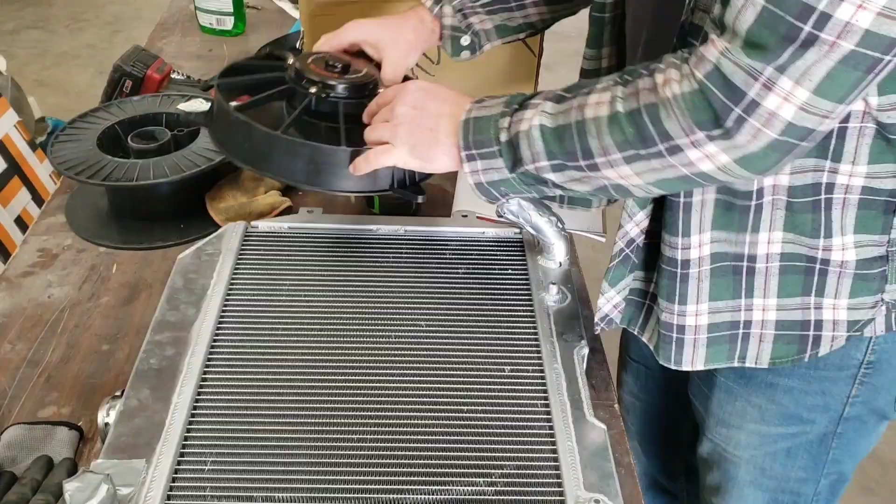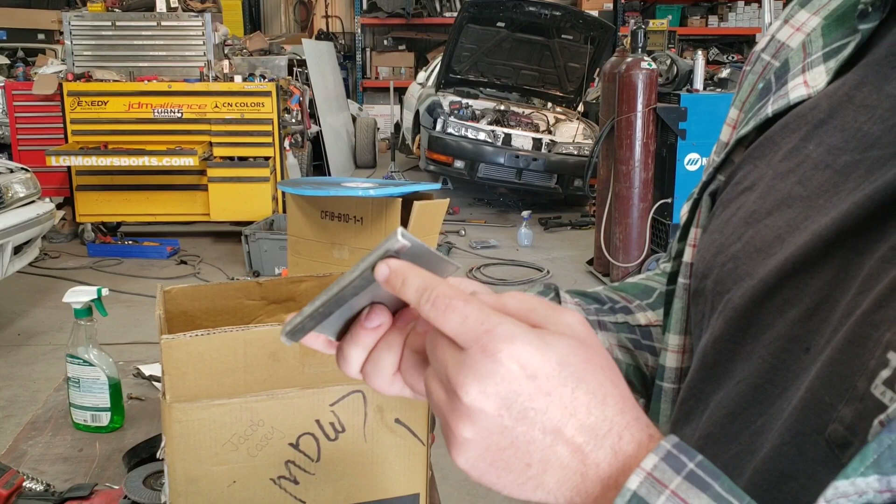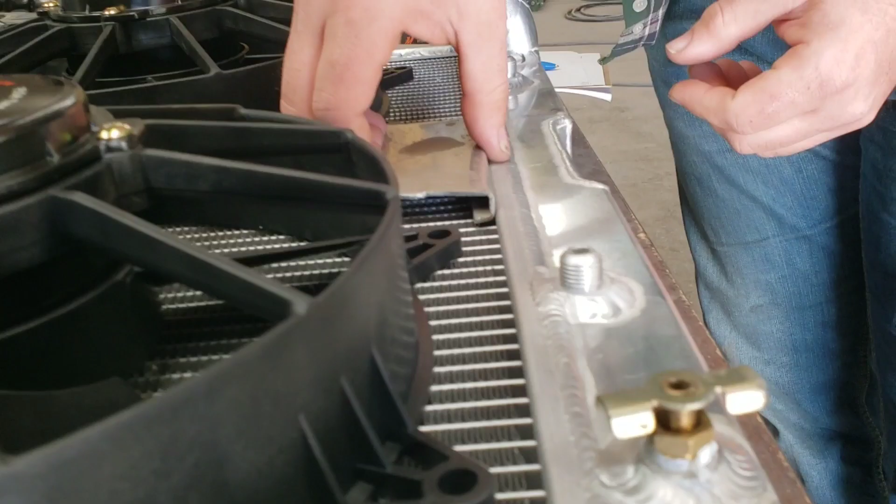We're going to be running 2 of these Mishimoto fans, and I've already gone ahead and bent up a test piece of how we're going to do this. So this is 080 aluminum. What we're going to do is make a lip and another lip with a flat surface, and we're going to put that foam right along the bottom there. So when it sits down on the fins, it's got a nice cushion to it. It's not going to sit there and rub through the fins of the radiator or anything.

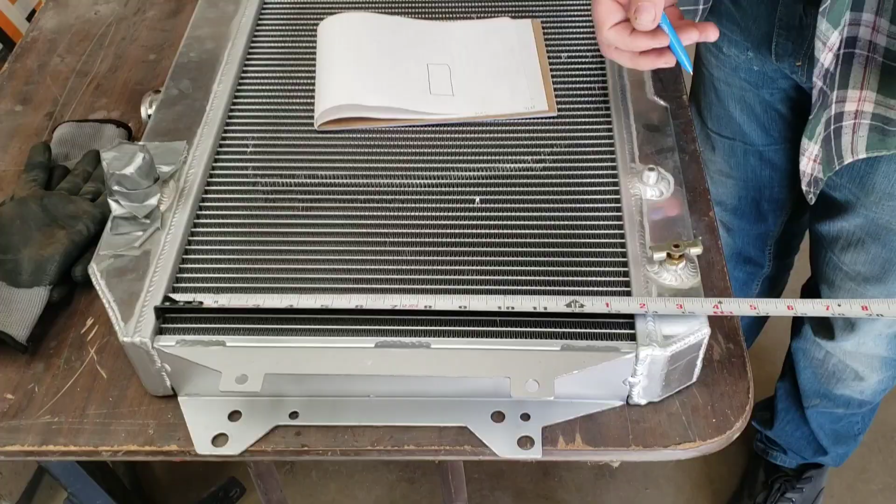So let's get started. So I'm drawing up the radiator shroud of how I want to do it. We're going to start by measuring the radiator. Inside to inside we have 13 5/8, so we'll just call it 13 1/2. It'll give us a little bit more space. And then we're going to do inside to inside long ways, and we've got 23 1/4.

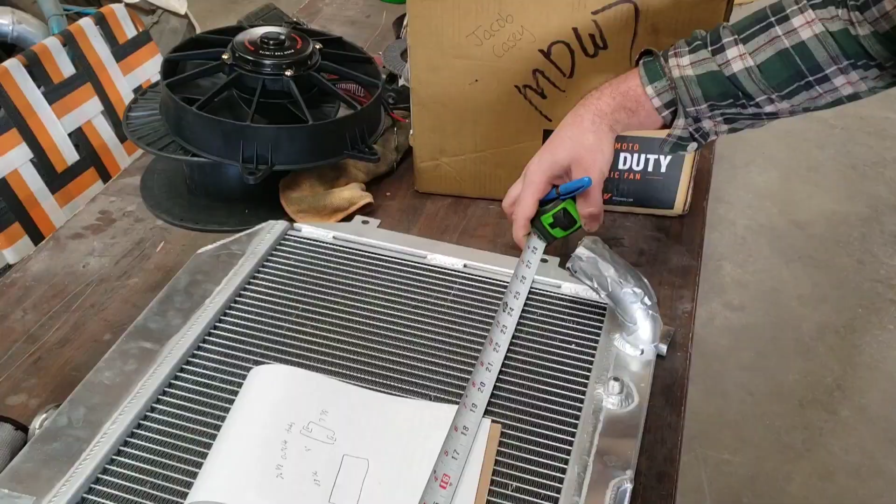And then we're going to go to the outside and add for the mounting points. And then our mounting tabs here, we've got 9 inches outside to outside. Just start on an even number. So 2 to 9 7/8, so that's 7 7/8 center to center. The same thing across. So that's 27 5/8, so we'll put 25 5/8.

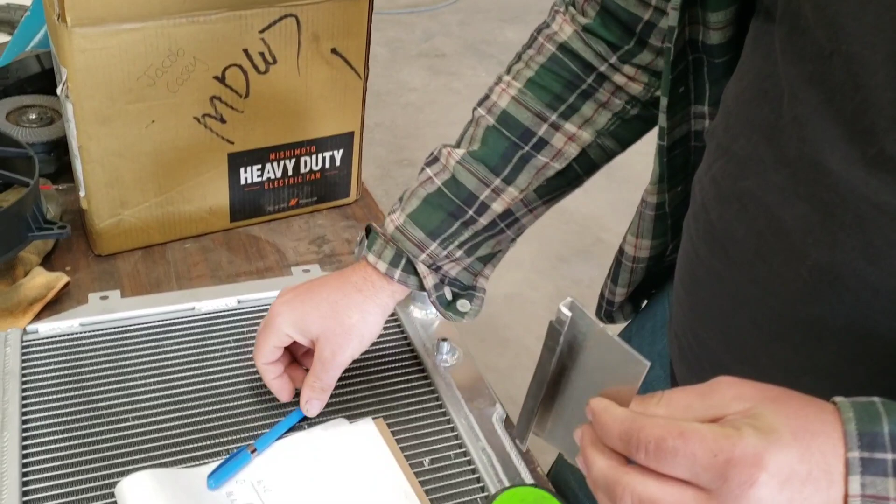So like I said, I've got a test piece here of how we're going to do this. So you've got about a 1/4 inch spacing here and a 1/2 inch spacing here. So we're going to add on another inch to this. So we'll call it 1/2 inch, and we'll call it 1/2 inch because the radius of the bend is going to reflect some of that. We're actually going to go 23 1/4 just to get our inside to inside, and then on the drawing I'll add the excess mounting points. So let's go ahead and draw it up.

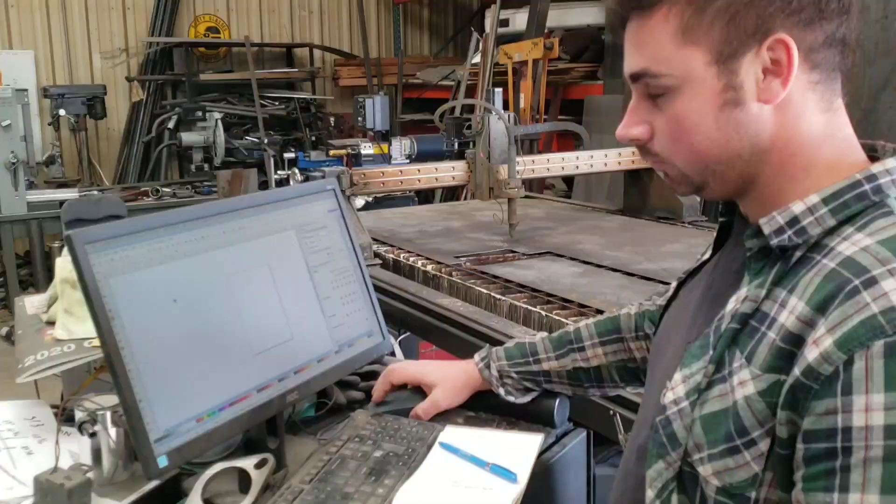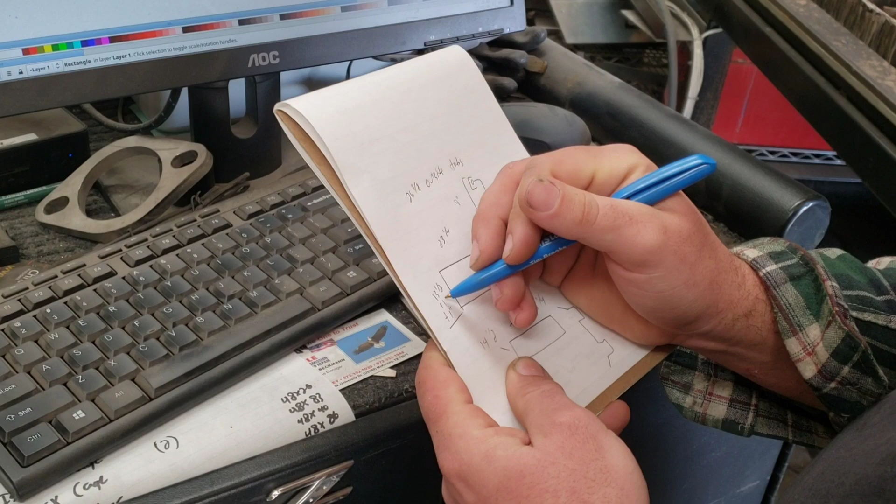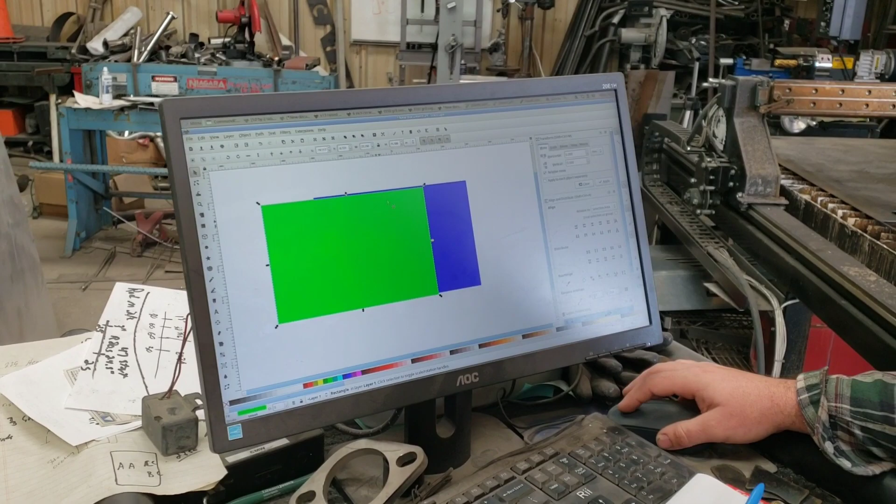So being that I don't have CAD software at the shop, we are going to be drawing this up on Inkscape. And the width of it is going to be 23 1/4. And the height, we're going to have our 13 1/2. We're going to have +1 for the bottom, +1 for the top. So we're going to have 15 1/2. So now what I'm going to do is make a secondary one. And we're actually going to change the height to 13 1/2. Center these two up.

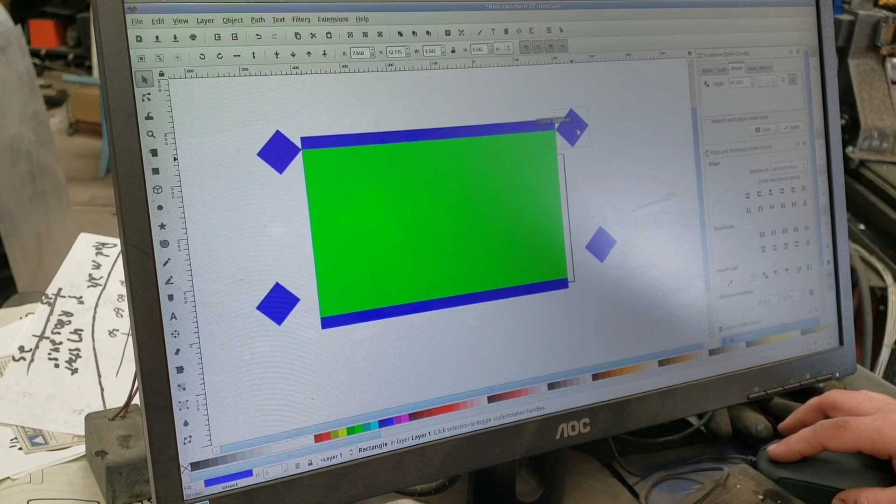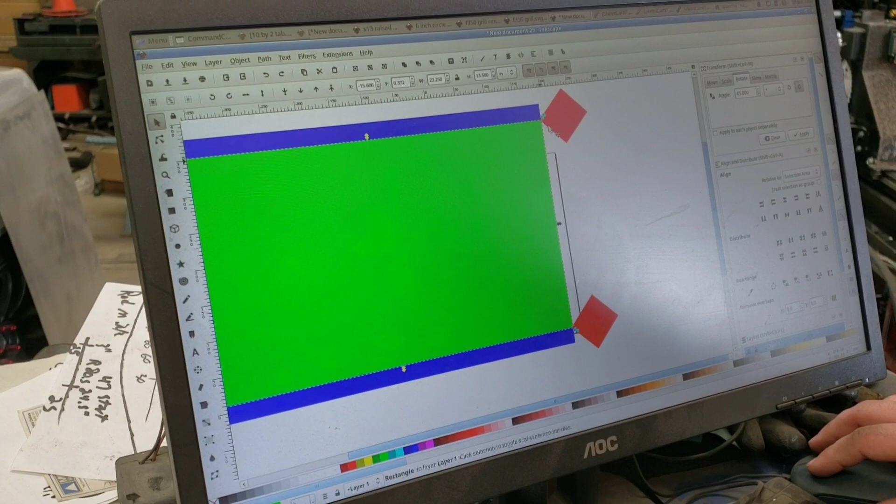So the green rectangle here gives us our dimension of the radiator itself. And so we're going to take this. This is an easy way to make some bends. If you put these spikes on here, you'll see what we're doing. So we just want to get those corners all lined up, move those in, and I'll change these to red. And you can see here that red is overlapping our blue, which is the shroud that we're making. So that point to the other point here, that's where we're going to make our bend and give us the dimension of the radiator. And I'm probably elaborating on this way too much.

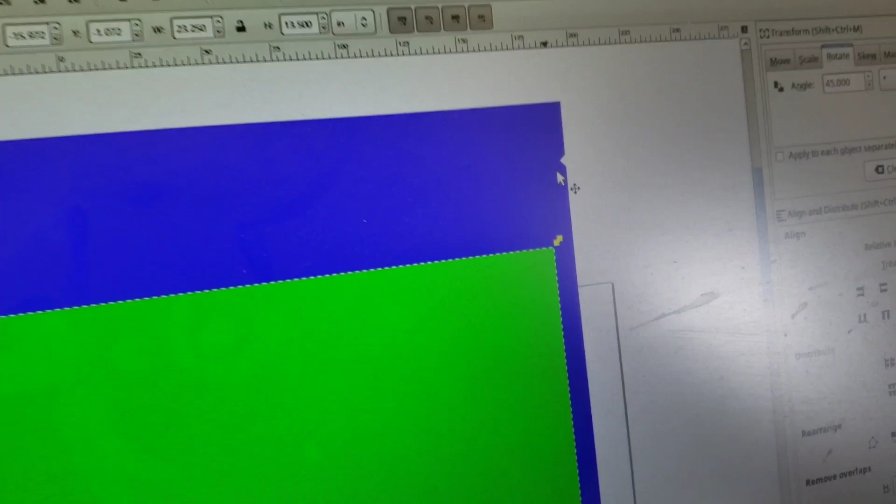So we're going to make all those one, and then we'll select our inside square and subtract them. Now you can see that notch that we have there. That's going to tell us where to bend this. I just went ahead and drew this up. It was taking forever for me to try to do it on camera. It would have made this video an hour long, but it only took me about 20 minutes or so.

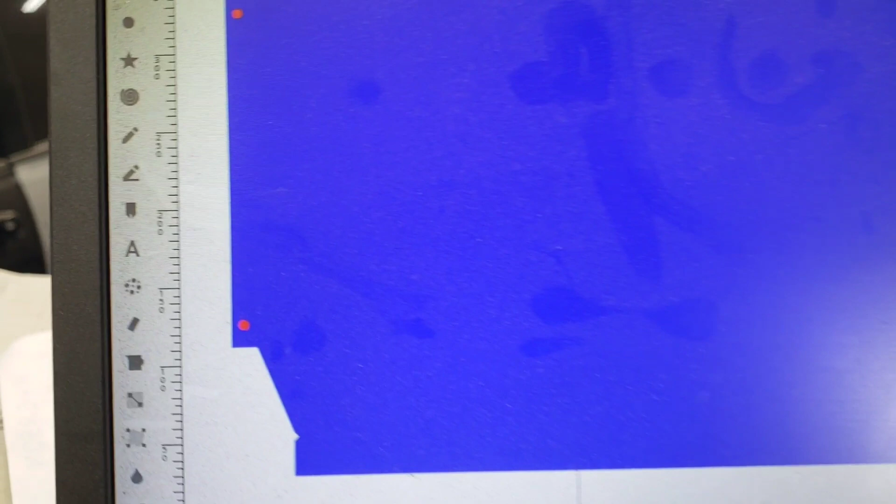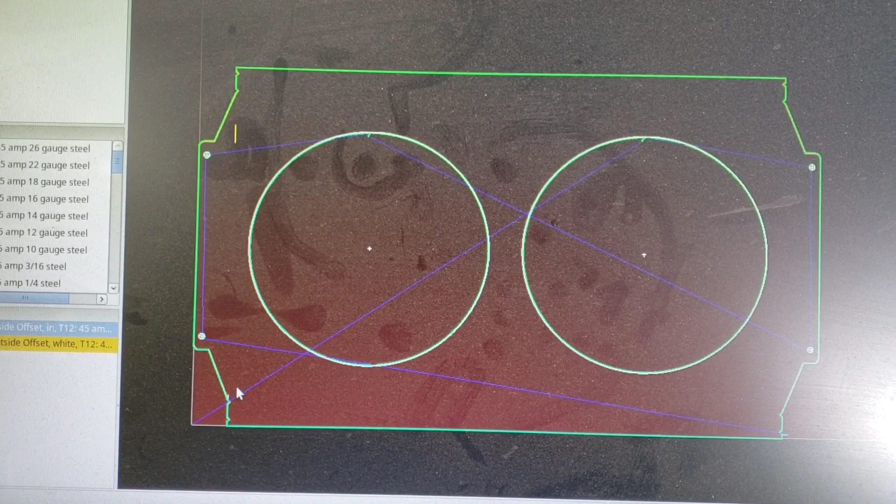So there's our fan shroud outside with our mounting tabs and the red dots. And so what we're going to do is trace up the fans and go ahead and cut the circles out for those. So here's our final flat surface layout for the fan shroud. I've already put it in SheetCam, made the G-code file, had a couple little pieces here that don't really matter much. We just ignored those. Got it loaded. We've got our material loaded, and we are ready to cut.

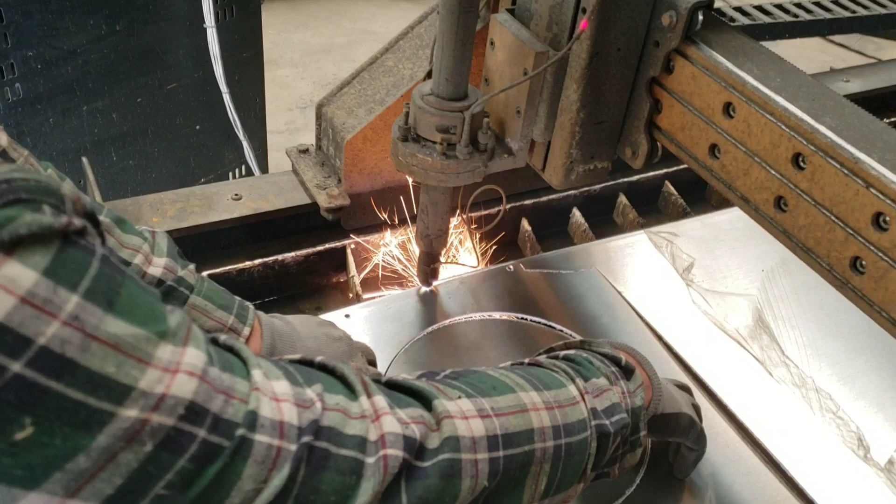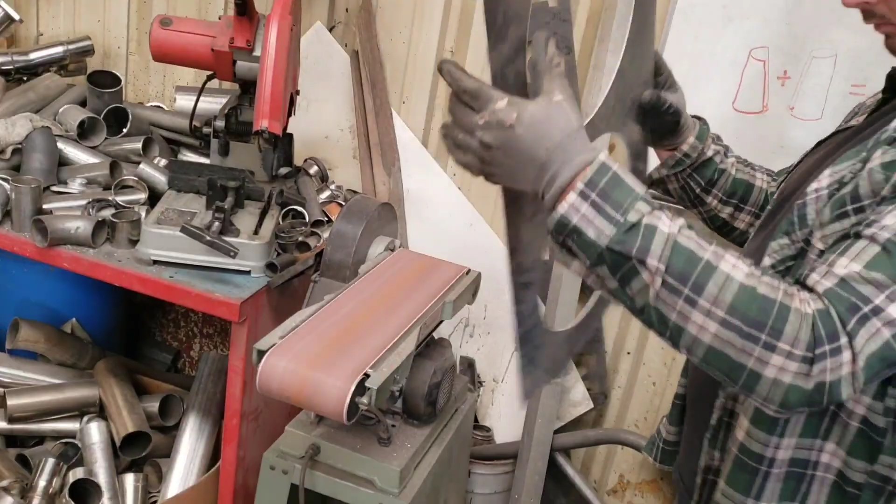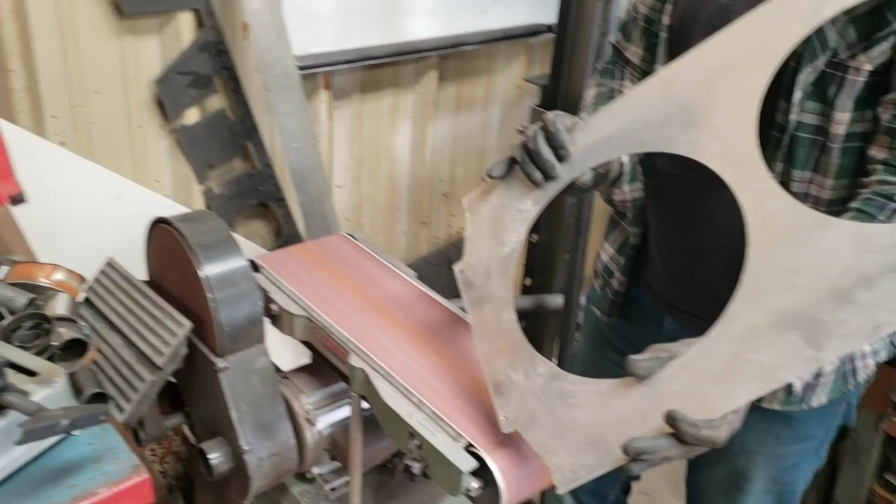We finally have our piece. So we'll go ahead and clean up the backside and deburr it all and get it bent up. We're gonna go ahead and use our deburr tool, clean up these outside edges. Now that we've got it all cleaned up, let's go bend it.

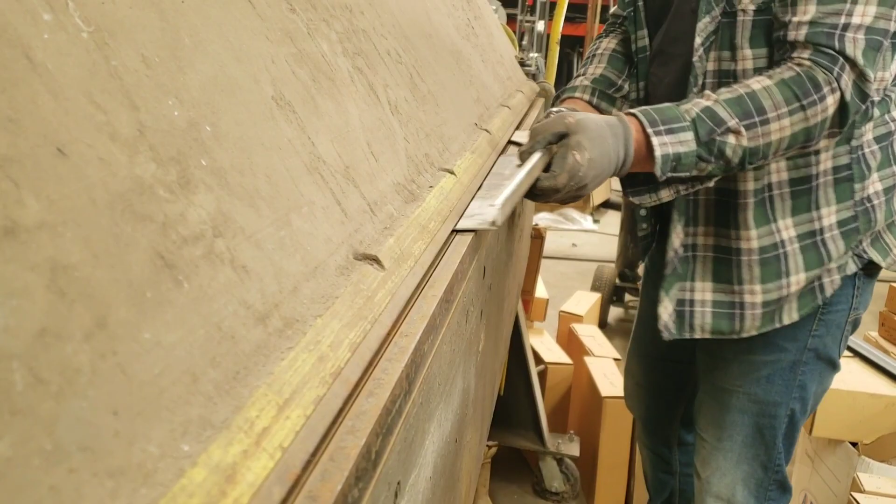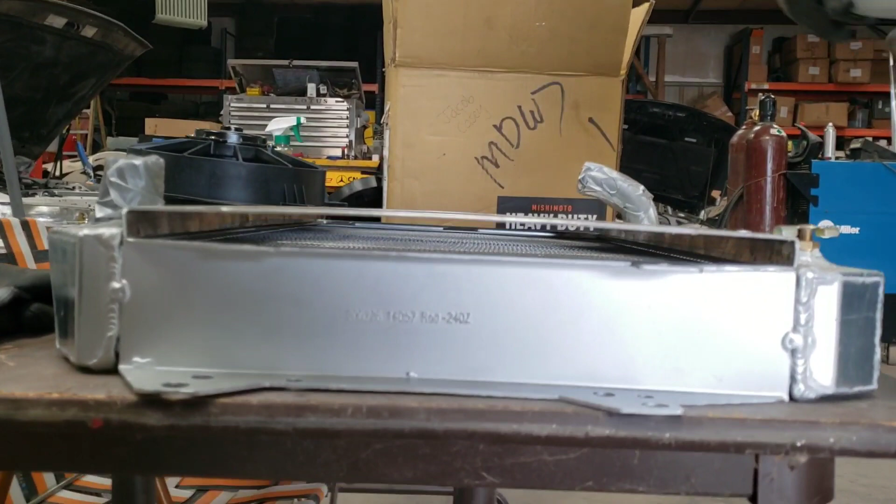This is where those marks come in handy with lining up, so we don't have to sit there and measure with a Sharpie. And all it took us was a few seconds. The shroud sits a little high on the radiator, which is okay. We've got less than an inch of space there.

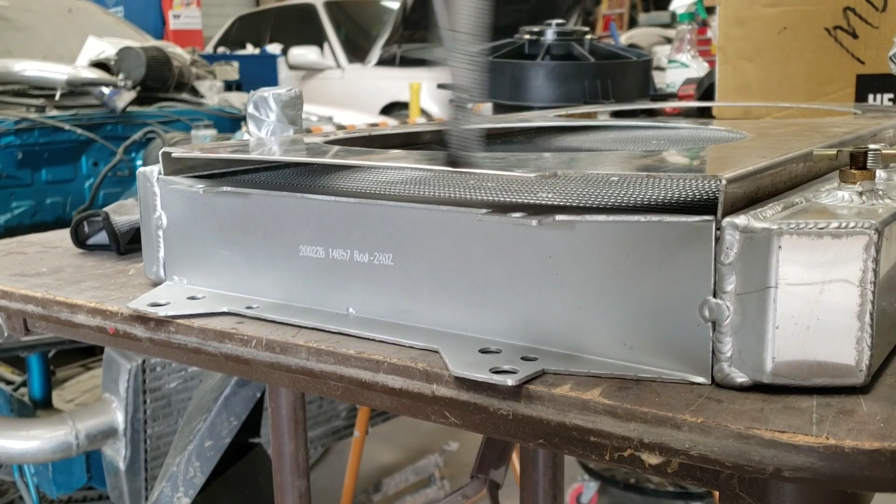So what we're gonna do on these edges here is we're gonna run down, and we got a 1/2 inch gap all the way around, and we are gonna take and cut a piece of filler that runs the whole length of this to help us fill that empty airspace in with.

If I could fucking talk today.

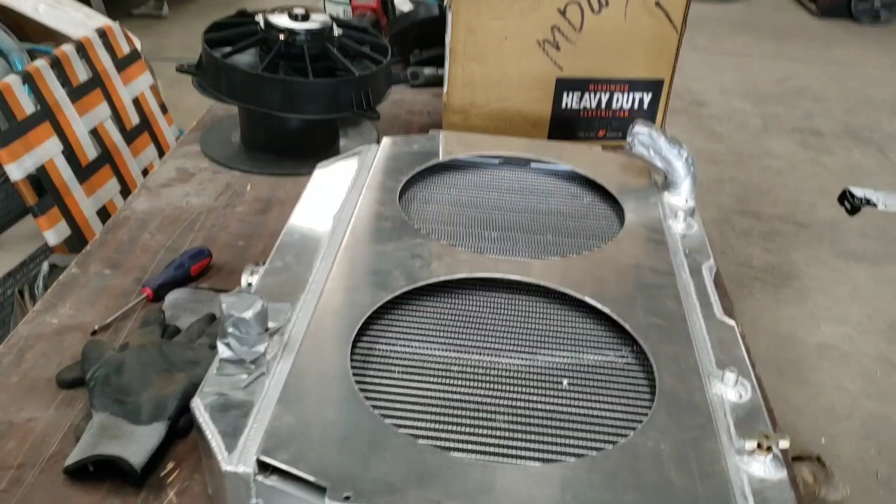I cut out some of these end wings here. That's what we'll call it. We'll go ahead and line it up right on the edge, which is, it's got a 1/2 inch from that edge to the outer edge, from the point to the outer edge.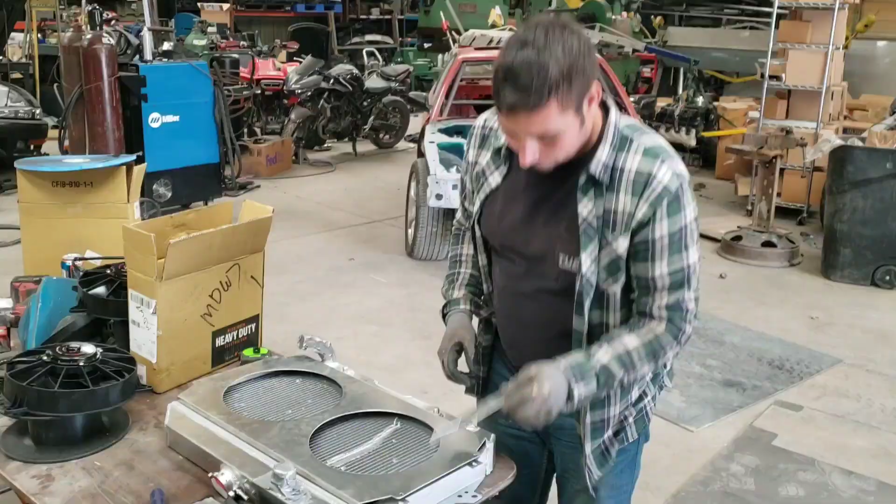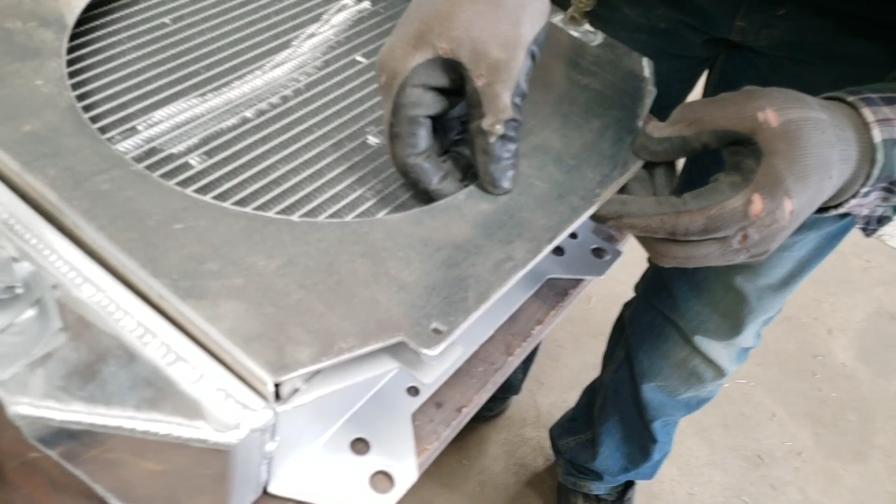Let's go see how it fits. These are just gonna fit inside of here, just like that. And we could either leave it as a bolt-in part that gets sandwiched, but we'll probably go ahead and just weld these in. You can see the underside there, that gap is filled in.

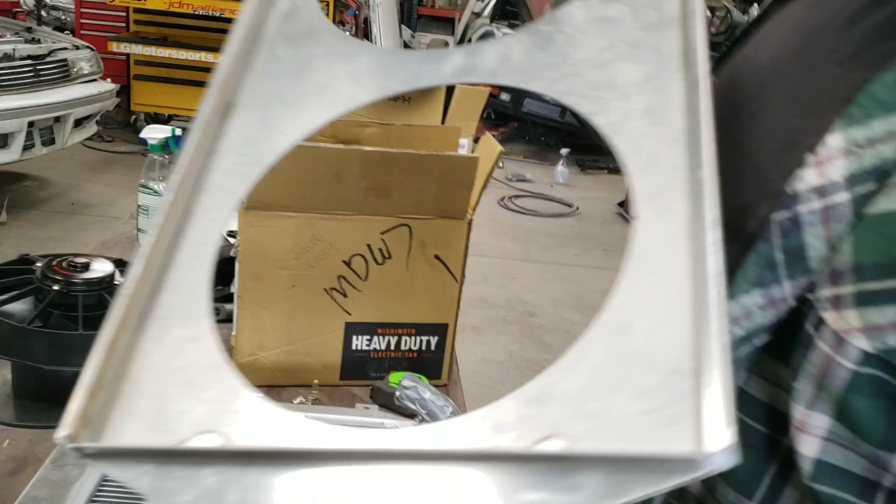So now that we've got our ends welded up, we ground them down just for clearances. It's time to fit it and fasten it. Just make sure it fits one last time before we move forward. Everything's tight, that gap's filled in.

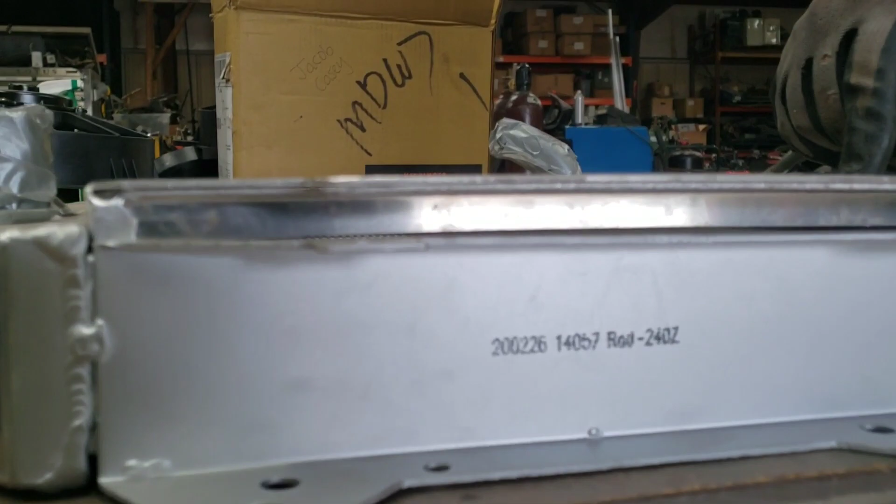So what we're gonna be using, these are called riv nuts. What it is is a threaded insert. When compressed in a hole, it mushrooms out and creates a tight area to fasten to. But our holes are a little bit too small.

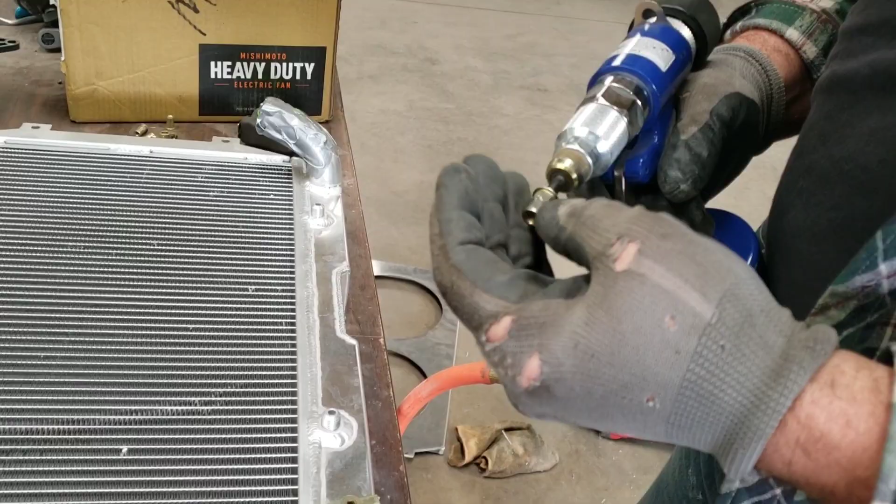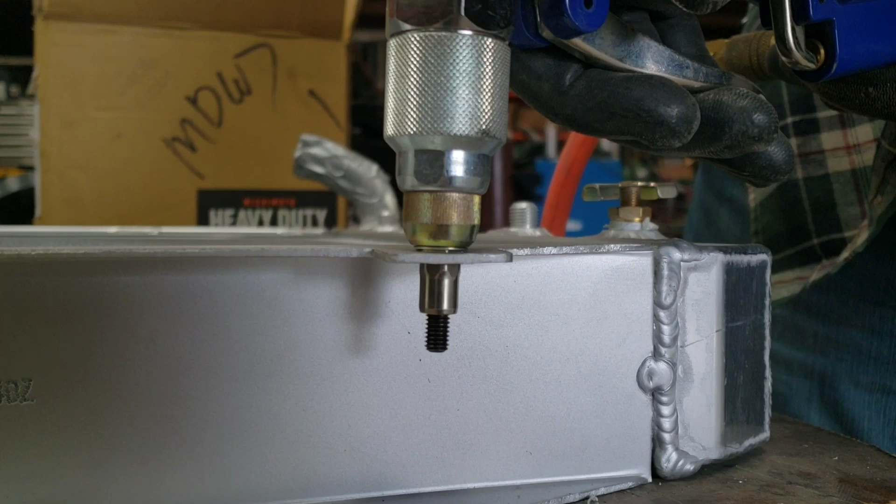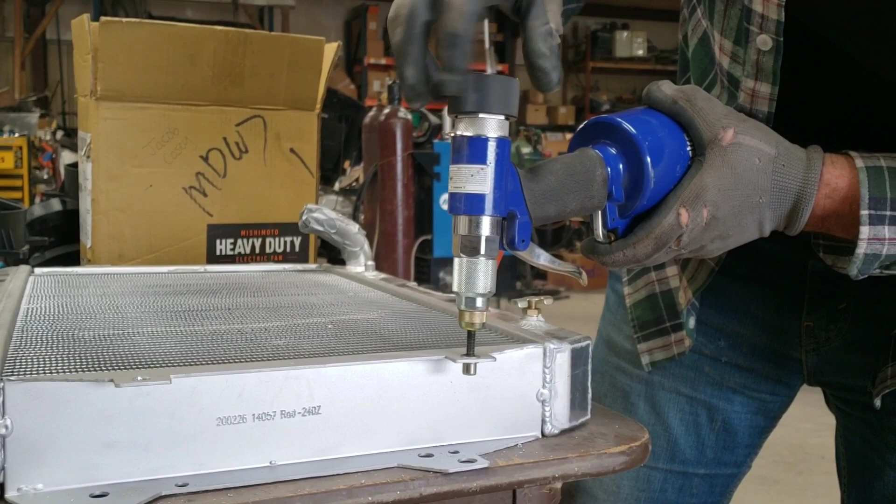Put these in there like so. Press it down all the way, and then just thread it out. I'm using a drill bit slightly smaller than the riv nut itself because we want to ensure a tight fit.

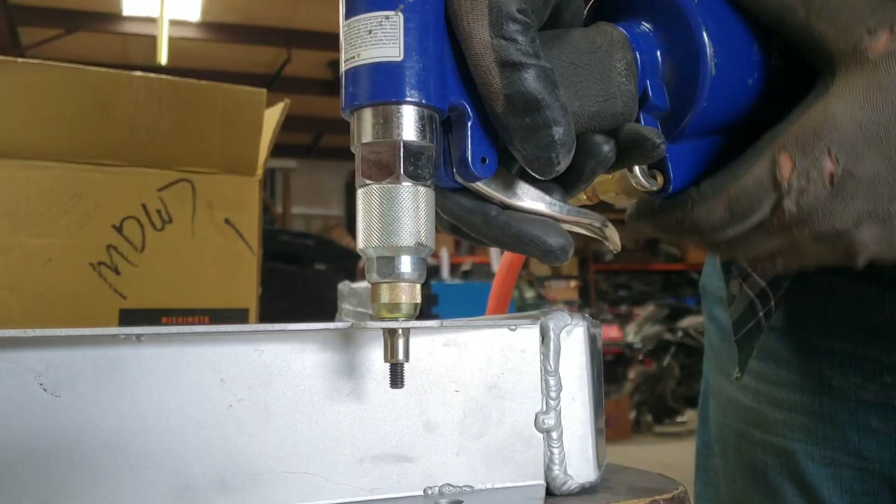Okay, so now that we've got our fans set on here, we got them evenly spaced around the holes, evenly spaced from the edge, and we are going to go ahead and mark the marks and drill them out.

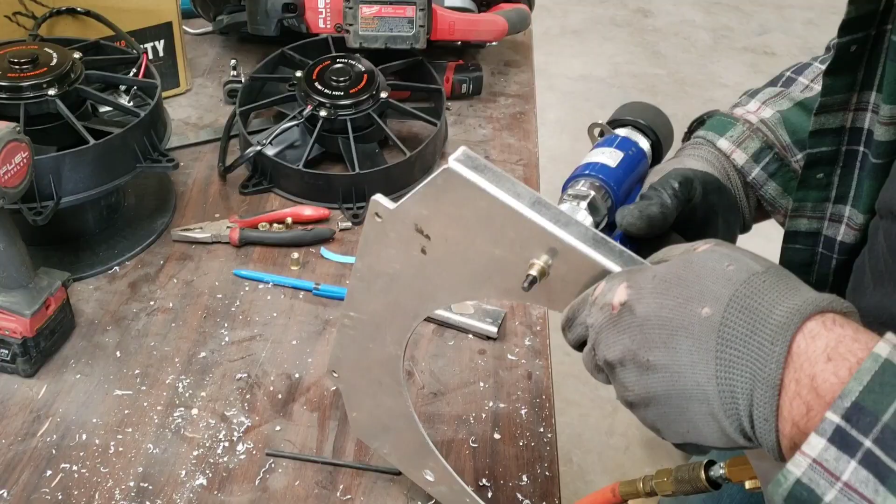So because our fans are so thick, we can come in through the backside with the riv nut, and I don't want to protrude the riv nut in towards the radiator, so we're just going to pop these from the inside out. You can see there how it sits.

So now that we've got our fans fitted, I'll let you come take a look at this. You can see it's pretty well nice and secured. We've got some brand new hardware here. We're gonna go ahead and put some thread lock, just to keep them from coming loose. We're going to give them a quick tighten.

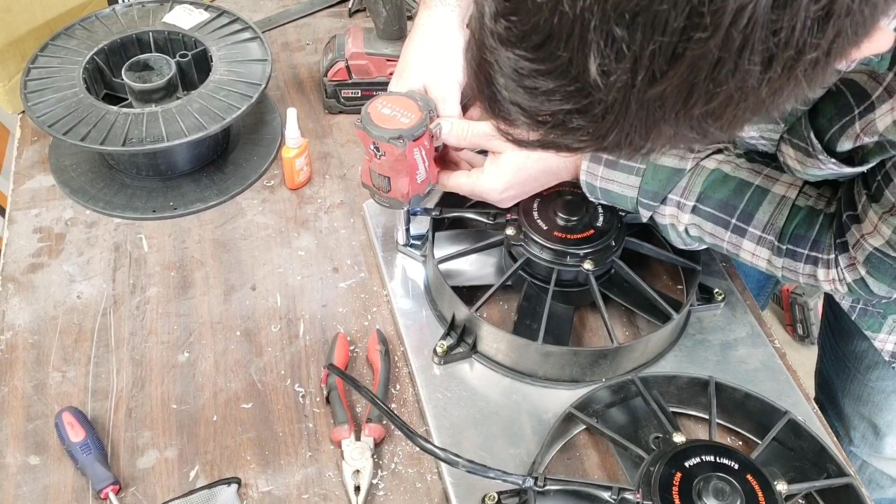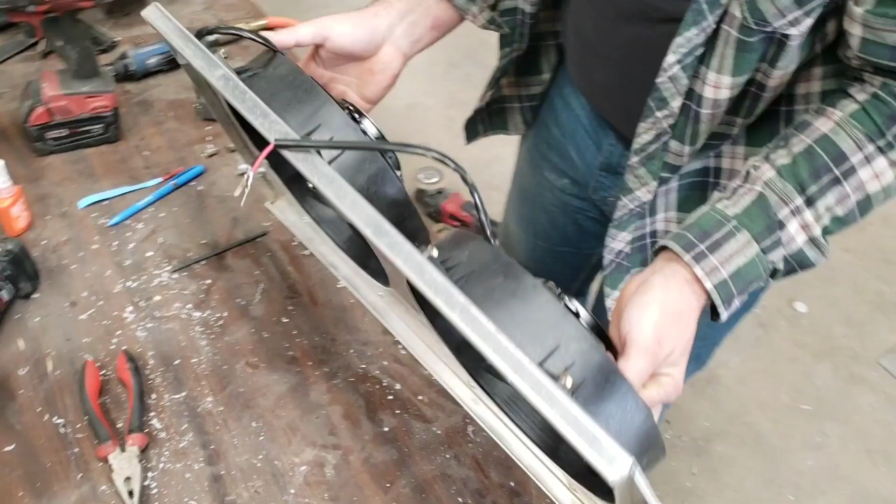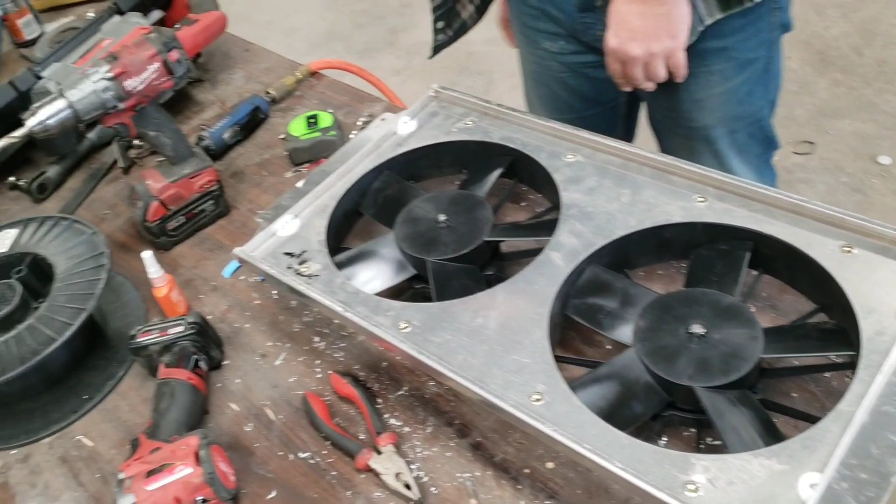We don't have any bolts poking through the backside. So now we're ready to go ahead and put on our weather tape and do a final install. Alright, here we go. This is the final install of the fan shroud. We're going to go ahead and make some spacers to fill up that gap there. But yeah, should suck some air pretty good.